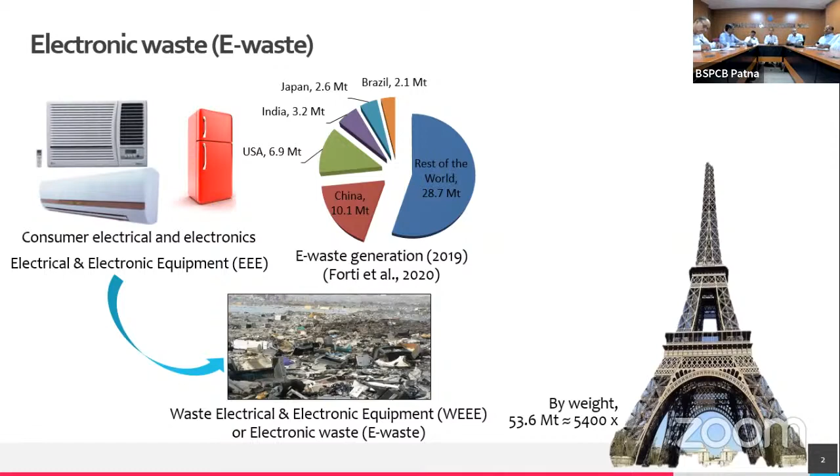If you look at the typical obsolescence stage of the various electrical and electronic equipment, you can see the computer's average obsolescence stage is 3 to 5 years. The laptop, and the consumer electricals and electronics mentioned, each refrigerator or washing machine, are 9 to 10. These are typical obsolescence stages. Because of this obsolescence stage, we need to think about this; we will discuss it at the end.

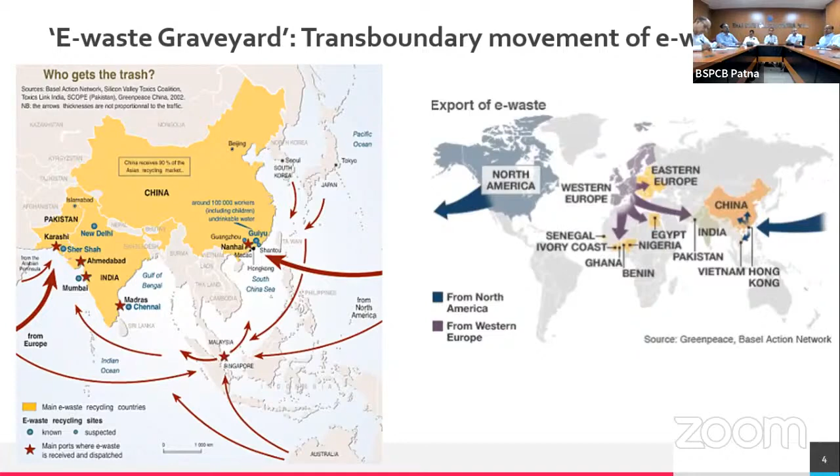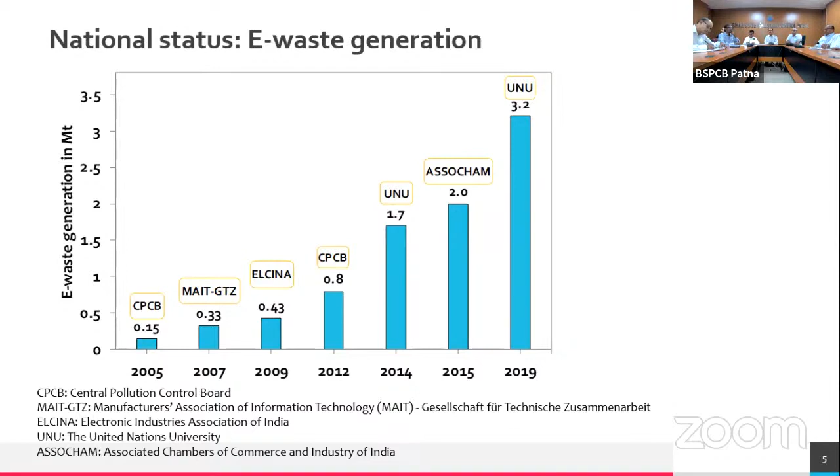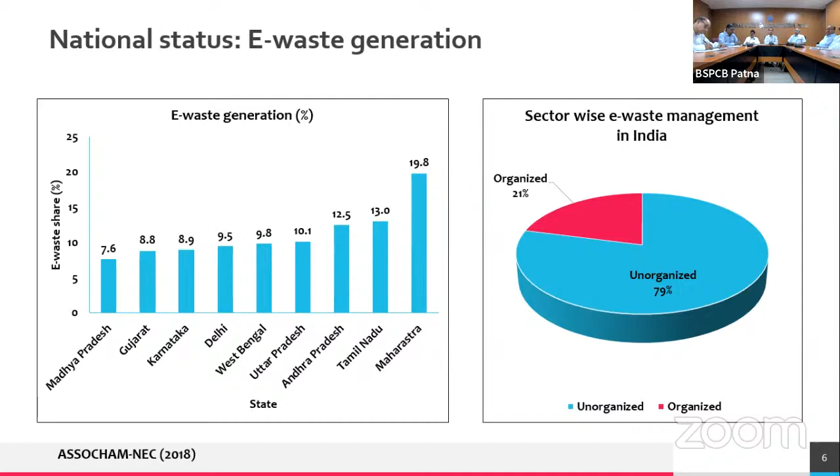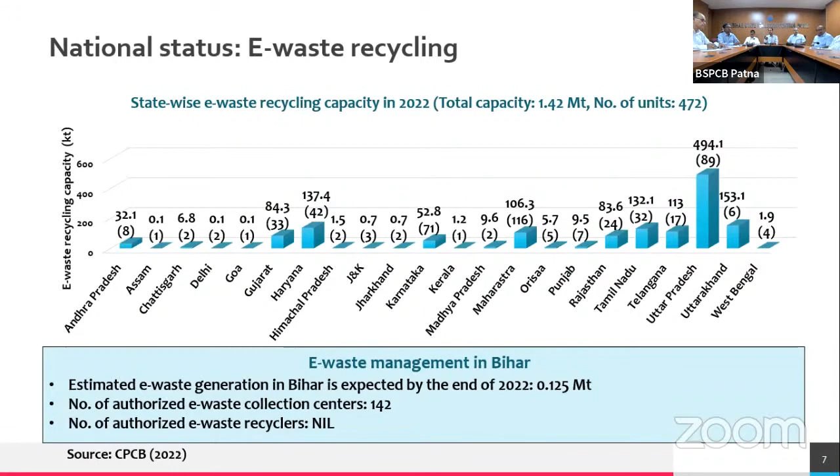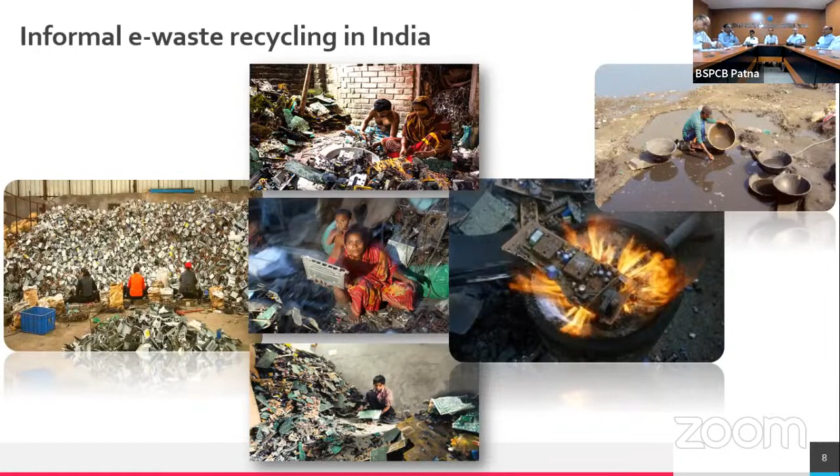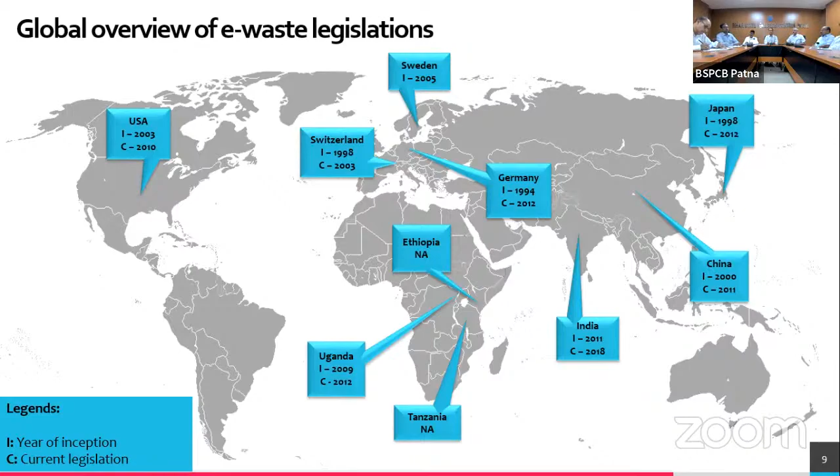Let's talk about e-waste regulation. First I will talk about the global view. All over the world, e-waste regulation started way back in 1990: Switzerland, Japan, the US. In India, we have started focusing on this area and developing a system. The e-waste rules of 2016 replaced the earlier ones, and were amended in 2018. Right now it's known as e-waste management rules. I will mention the salient features and not go into the next part, already dealing with.

And this is the extended producer responsibility plan, with a 10% collection of e-waste in the year for each producer, 10% up to 70% per producer. So a target approach we can implement. Also, we now have e-retailers as producers.

So if you look at the chain, what you have is essentially the producers. Producers have the dealer or the retailer. Some e-retailers are also producers. Let me clarify that e-retailers are those which exist including on the internet or the telecom network through which they sell electrical and electronic equipment. These e-retailers are very common nowadays, like Flipkart, Amazon, or eBay, and they are now considered producers.

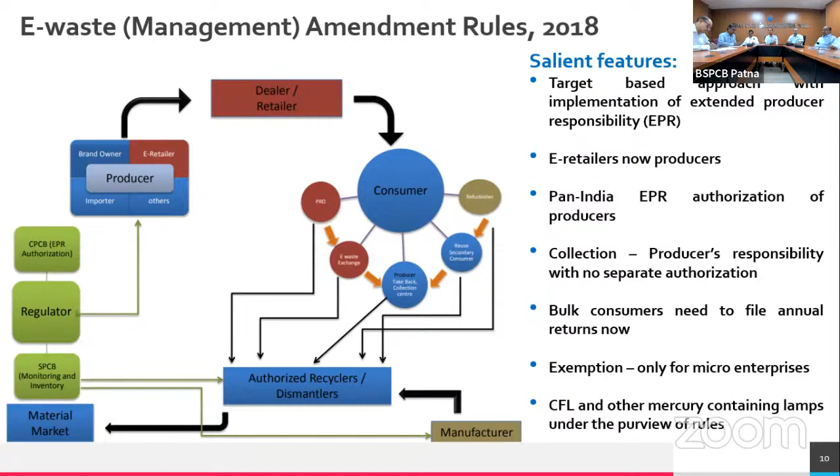So the stakeholders in this entire framework are the generators, which are the consumers and the bulk consumers. Then you have the e-waste handlers and processors, which include producers or producer responsibility organizations, PROs, through EPR, and producers also consist of dealers, retailers, and e-retailers. Recyclers and dismantlers also come under this e-waste handler and processor chain. Then you have the regulatory bodies: the Central Pollution Control Board, State Pollution Control Boards, or the pollution control committees in the union territories.

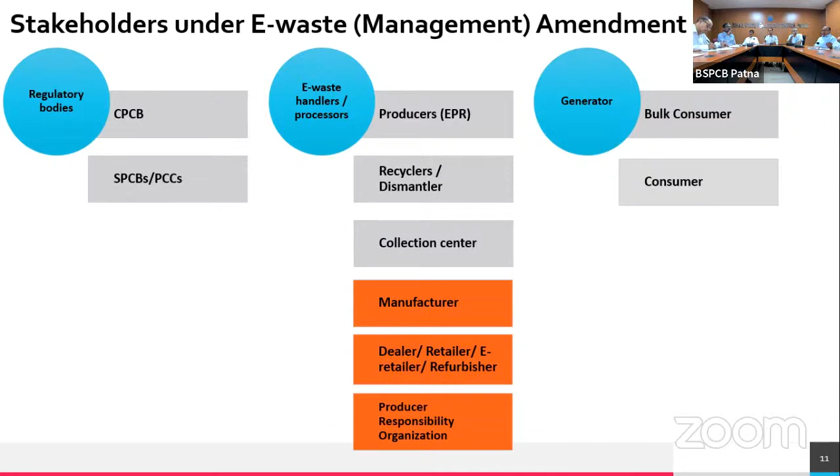Now let us introduce the circular economy, or CE, for e-waste as a tool. So far, what we are doing is taking a lot of natural resources, so that is the take. Then we are making the product, the electrical and electronic equipment, and then we are using it and disposing it. So what you have now is the take, make, use, and dispose model.

Now the circular economy is essentially a regenerative economic system, which is transitioning from this take, make, use, dispose model to a take, make, use, and regenerate resource model. Earlier, e-waste used to be thrown away or disposed of improperly or unscientifically, and thereby we have a lot of wastage of resources and wastage of economic value, and also environmental pollution.

So by transitioning from this take, make, use, dispose model to a take, make, use, regenerate resource model, we can have sustained economic growth, environmental protection, and it will also lead to a lot of job creation and societal well-being. And this is in line with the sustainable development goals which we need to fulfill by 2030.

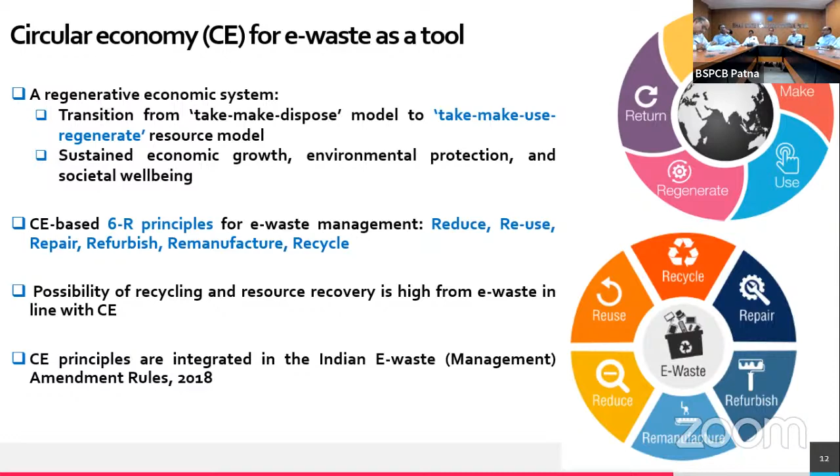Now let us look at e-waste composition. If you look at e-waste as an overall stream, we typically have around 37% glass and 30% plastic. The glass has a typical recycling route, as does the plastic, so we will not focus on glass and plastic in this talk. As the title says, we focus on the metallic part. When you talk about metals in e-waste, mostly you will have iron, copper, aluminum, zinc and lead.

These are the metals most prevalent in terms of weight percentage. Apart from that, most importantly, we have a lot of precious metals, like silver, gold, platinum, also present in substantial amounts. We also have a lot of rare earth elements, which are not typically the focus in the e-waste stream. These rare earth elements are pivotal for developing any new technology in the electrical and electronic equipment sector.

Now, a typical source of these rare earth elements is ores from mining. These mines are monopolistically controlled by a few countries, including China, and China has stopped exporting these rare earth elements. Another aspect is that their extraction from the ores is very cumbersome. So what is the way out for any other country? Because if you do not get rare earth elements, programs like Make in India will ultimately suffer.

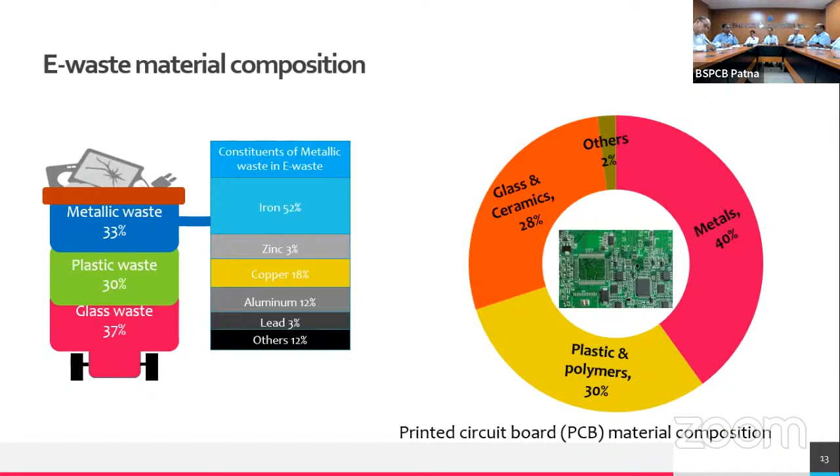So based on this, I can show you what you typically have. This is from our laboratory in IIT Patna, the pollution prevention and resource recovery laboratory. There you can see a typical end-of-life computer printed circuit board. On the printed circuit board you can see there are a lot of mounted components, apart from the base material or the platform.

In these mounted components, you can name any element and it is present, whether you look at capacitors, resistors, or the solders. Apart from these mounted components, in the base or the frame you have a lot of metals as well. People will understand why we are using, let us say, gold and silver here. Gold and silver are typically used as soldering material, apart from lead and tin.

Also, we need to provide some kind of thin film over this. The thin film is essentially of gold and silver, so that you can protect all these embedded metals from the corrosive environment. Otherwise, these electrical signal pathways will get corroded over the years. So a thin film of gold and silver is provided. So this is one example.

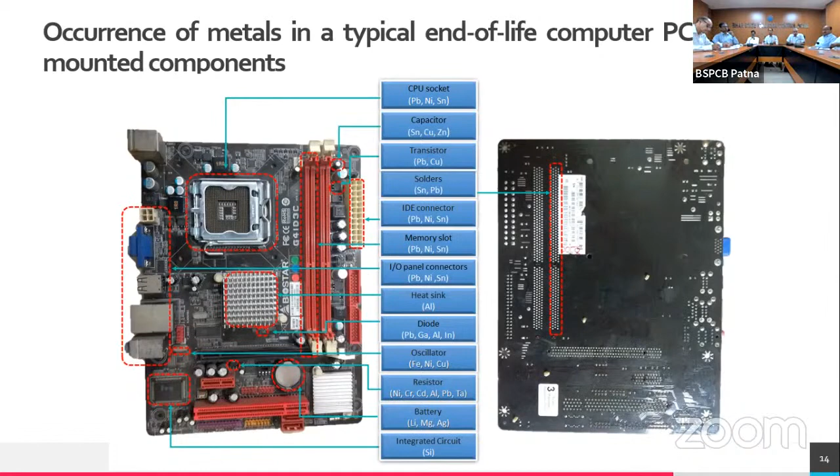Similarly, this is a typical printed circuit board of a smartphone. As you can see, in the mounted components, you name any mounted component, a lot of metals are present, including precious metals and rare earth metals.

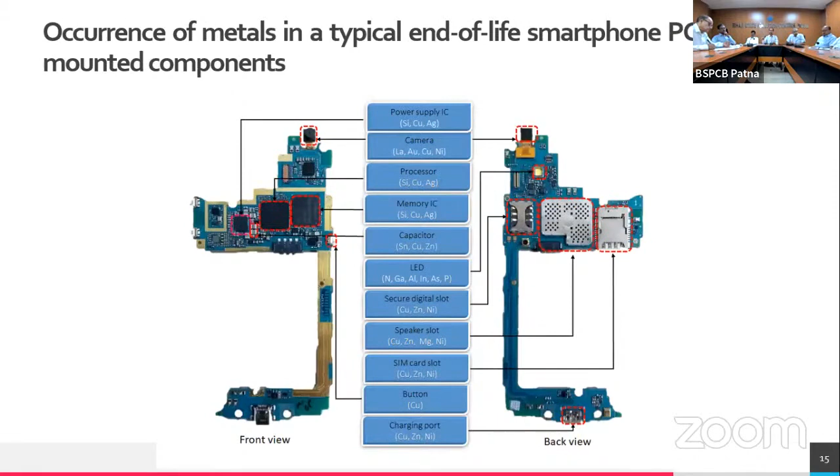Similarly, this slide is not working.

Yeah. So similarly, this is a typical printed circuit board of a cathode ray tube. Earlier, we used to have bigger tubes, so this is a cathode ray tube television, I'm not talking about smart TVs. This is the typical CRT TV printed circuit board, and this is a bigger one. Here also you can see a lot of mounted components apart from the platform or base. So everywhere, whether in the mounted components or the base, metals are present.

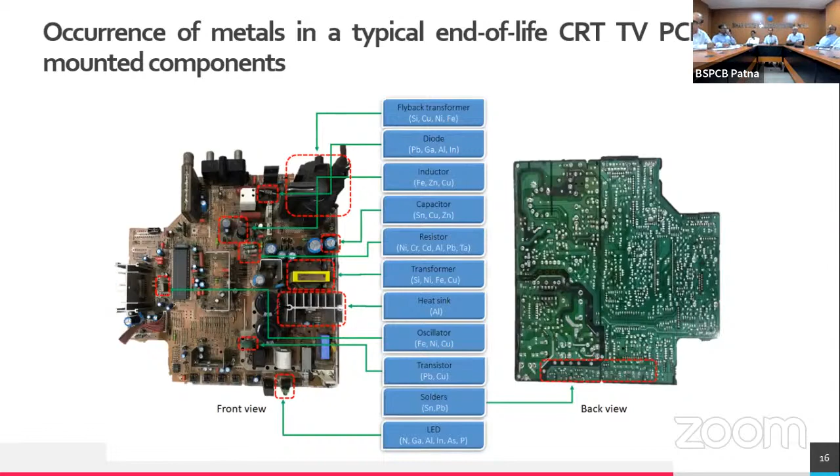So our job is to extract these metals from this complex platform so that we can reuse them again in manufacturing electrical and electronic equipment, so that the circular economy approach can be integrated. Now, since we are talking about recycling techniques, particularly focusing on printed circuit boards, the metal extraction or metallurgical techniques are essentially three.

Then the second technique is known as hydrometallurgy, also known as the chemical leaching technique. Printed circuit boards are subjected to chemical treatment. What kind of chemicals do you use? Typically, strong acids or strong alkali. What are the strong acids? Any kind of mineral acid, such as sulfuric acid, hydrochloric acid, or nitric acid.

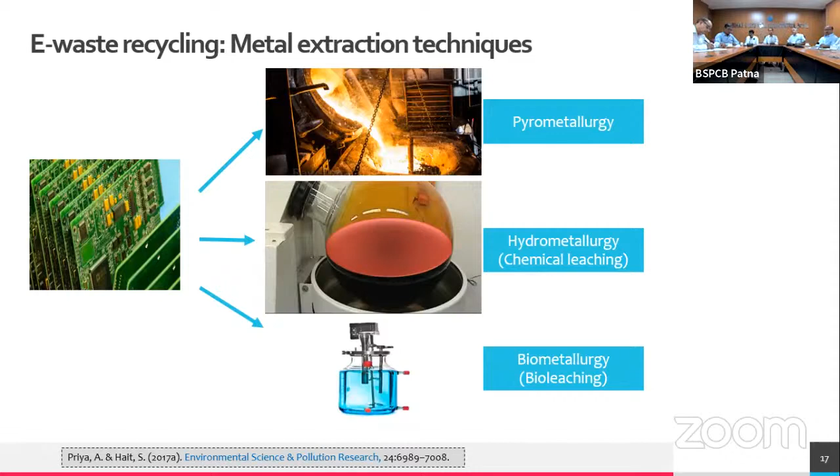So this process, biometallurgy or bioleaching, is eco-friendly and efficient. It does not create any kind of secondary pollution, but it is essentially a slow process, since we are employing microorganisms.

Okay. So if you look at the advantages and disadvantages I have mentioned here, from the environmental impacts point of view, the red one signifies extensive, the blue one is fair, and the yellow one is low. If you look at pyrometallurgy, the hazardous gaseous emissions will be very high, because you are burning the plastic, since the PCB matrix is essentially plastic. Then hydrometallurgy will have a fair amount, and the least amount of gaseous generation you will get in biometallurgy.

With respect to wastewater generation, you can see extensive wastewater is generated in hydrometallurgy, which could be corrosive or hazardous in nature. The least amount is in pyrometallurgy, and some amount can also be generated in biometallurgy. But biometallurgy techniques are essentially biodegradable.

Fine. So based on this, you will have compatibility with the environment. Here, high compatibility with respect to biometallurgy, followed by hydrometallurgy, and then pyrometallurgy. The least compatible with respect to the environmental component is pyrometallurgy.

Similarly, how much investment is required? The investment required will be very high in pyrometallurgy, followed by hydrometallurgy, and least in biometallurgy. Similarly, we provided energy consumption. Since we need to burn the waste, we will have a high energy requirement in pyrometallurgy, followed by hydrometallurgy, and then biometallurgy.

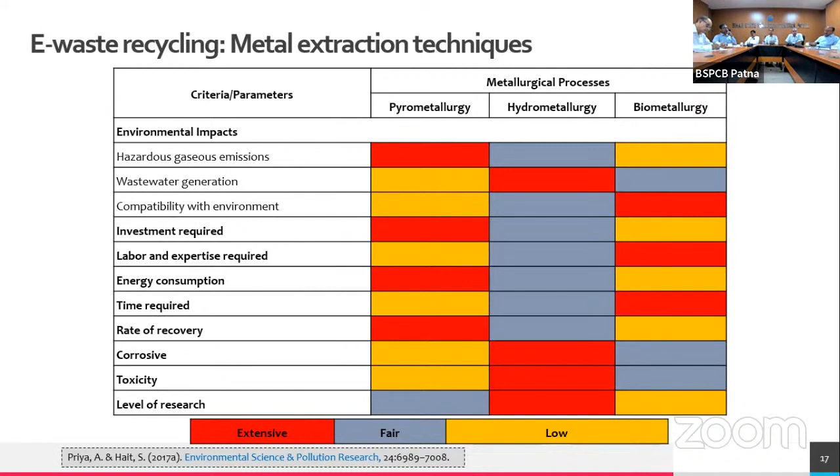Fine. So based on this, what was our motivation to work? If you look at the printed circuit board, with respect to its structure, its manufacturing process, and its composition, it can be of various types. Now, you have printed circuit boards from a lot of electrical and electronic equipment: some are IT and telecommunication equipment, some are consumer electrical and electronic equipment, some are large household equipment.

So our motivation was to see how the printed circuit boards we get from various electrical and electronic equipment differ in terms of composition. Because when you go for recycling or metal extraction of the printed circuit board, first we need to know how much valuable metals or other metals are present, and how printed circuit boards from different electrical and electronic products vary. So this was one motivation.

The second motivation was, let us say you do not dispose of or recycle this electrical and electronic equipment in an environmentally sound way, and you throw it into the open environment, with the solid waste stream, once it becomes obsolete. If it is exposed to the environment, sometimes it will come in contact with surface water, groundwater, or acid rain, and ultimately reach the surface water and the subsurface groundwater, and it will contaminate them.

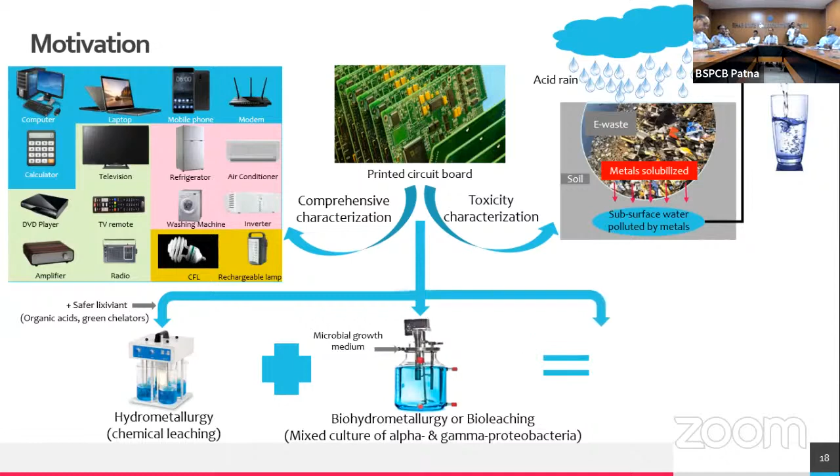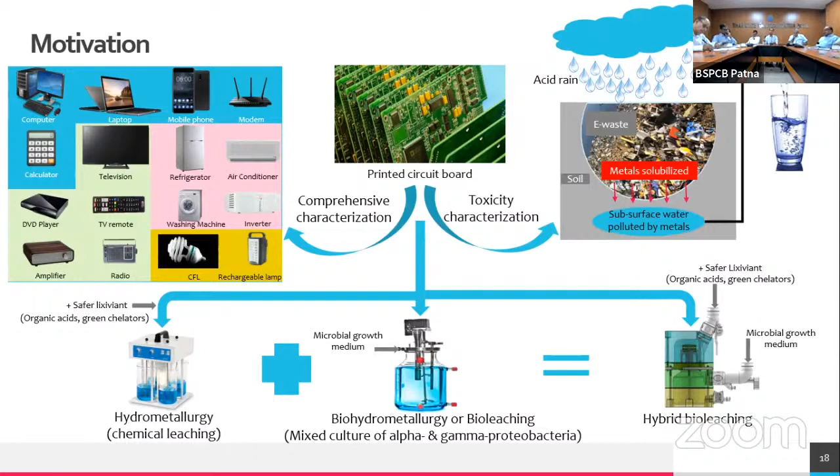And can we have some kind of technology development, which we call, let us say, hybrid technique or hybrid bioleaching technique. This is just one example that chemical leaching and bioleaching can be combined. And thereby process efficiency can be improved, as well as the time requirement can come down. So with all these modifications, let us first look at the characterization of printed circuit boards of various end-of-life electrical and electronic equipment before we go for their recycling effort.

So here you can see almost 16 electrical and electronic equipment covering IT and telecommunication equipment, consumer electrical and electronic equipment, and large household equipment. So from each of those equipment, we have collected printed circuit boards from 2 different brands, 3 each. So you have 16 electrical and electronic equipment, 2 brands, and 3 printed circuit boards from each brand.

And then we have characterized almost 33 elements: general elements, toxic elements, and precious metals like gold and silver. We have also characterized them in terms of rare earth elements. And we have also noted how, in a typical electrical and electronic equipment, the printed circuit boards vary in terms of their weightage. Methodology-wise, we pulverize or crush them, then acid digest them in the microwave digester, and then determine the metallic content in the ICP-MS.

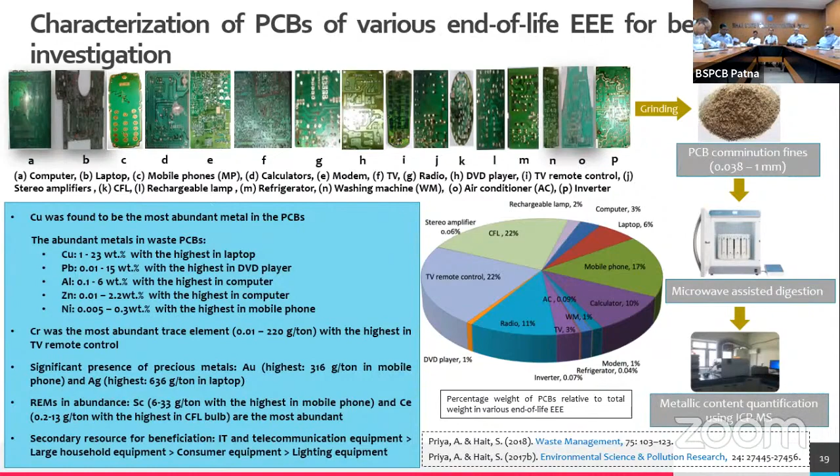Now, we wanted to also look at a particular product, let us say the mobile phone, and how its metal content has changed over the years. We have had basic phones in early 2000, and then subsequently, 2004 or 2005, we have smartphones. How has their metal content changed? And at the beginning of that period, a lot of international legislation also came, like the restriction of hazardous substances in electrical and electronic equipment, and the waste electrical and electronic equipment directive, essentially in the European Union.

So we wanted to look into whether, in a particular segment of electrical and electronic equipment, the manufacturers and producers have mostly focused on their market profitability, or on environmental well-being and environmental protection. That's why we have chosen the mobile phone as a product, and looked at how their material compositions in terms of metal have evolved over the years. So we have collected mobile phones from 2000 to 2016.

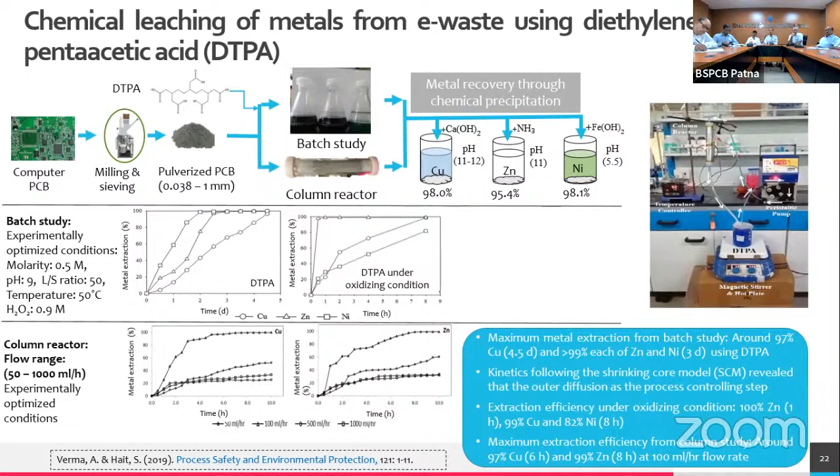So chemical leaching can also be utilized without creating secondary pollution, and it can contribute to the circular economy. The only thing is that we are not using mineral acid here. Only problem here is that it requires comparatively higher time. So there has to be some kind of trade-off between whether you want to harm the environment or you want to have a safer environment.

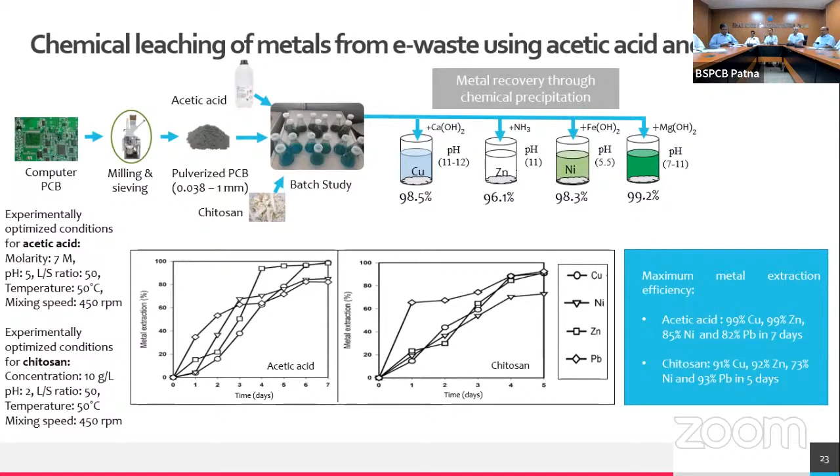Followed by this, what we have had is the biometallurgical technique or bioleaching technique. And there, as we have mentioned, mostly in the research they have essentially focused on individual species or a pure culture. So what we have done in our laboratory is we have taken computer printed circuit board, then we have provided pre-treatment. Then they are subjected to a mixed bacterial strain: one is Acidithiobacillus ferrooxidans and another is Acidiphilium. And they can complement each other. This kind of microorganism we have chosen.

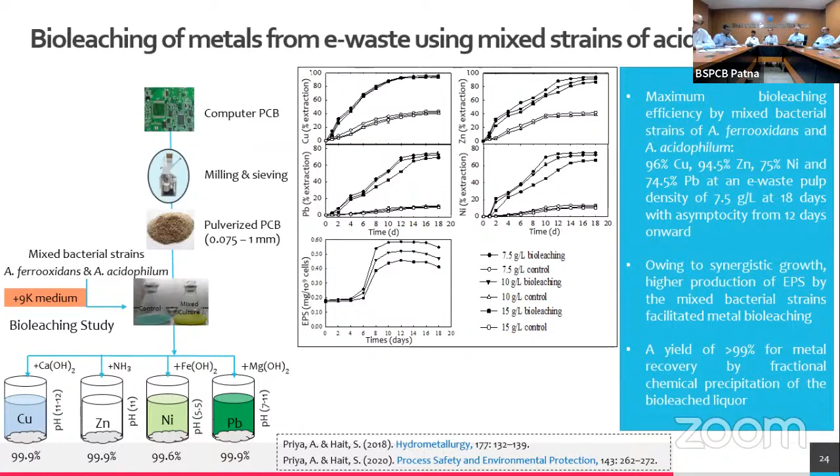So here also what we have seen is that whatever metals are extracted from this biometallurgical technique can be further recovered using chemical precipitation, and one can use solvent extraction or whatever other standardized techniques you have. And we can see the selective metal extraction efficiencies are also high in this case as well.

If you look at the mechanism, how this microorganism is acting on the solid particle or PCB particle, here we have ground them. In one mechanism, the bacteria, as part of their natural cycle, produce a lot of exopolymeric substances. Once they excrete these, using these exopolymeric substances they will bridge between the PCB particle and the bacterial cell. Now, as we mentioned, in the 9K media we provide some kind of iron salt, so you have plenty of iron. Now, what does the bacteria do?

One mechanism is what we call the direct mechanism. The bacteria attach to the PCB particle with exopolymeric substances, and then the bacteria also work on whatever ferrous iron you have in the media. So they are biologically oxidizing Fe2+ to Fe3+. Whatever metal you have in the PCB is in the ground state. Once you have this Fe3+, which is a strong oxidizing agent, it knocks the ground state metal to M2+, or let us say Mn+. So they are essentially bringing them into ionic state, and thereby they are available in the liquid medium. So this is what we call the direct mechanism.

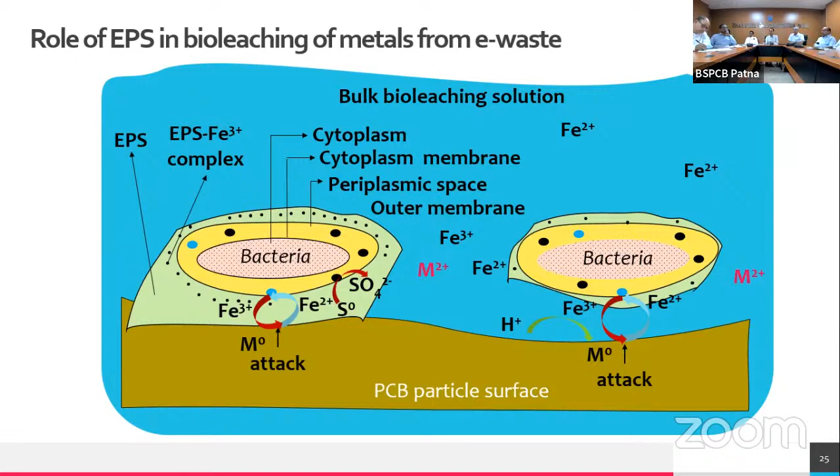Now what we have seen here in the biometallurgical technique is that even if you employ a mixed culture of bacteria, they are very efficient. But the time requirement is still, let us say, 12 days. Now we wanted to bring down this time requirement. As I mentioned, one motivation was to combine chemical leaching using safer materials with this biometallurgical technique. So what we have is a Jugaad method, something we use in day-to-day life.

Apart from the biometallurgy we have explained, what we have added is lemon juice. As you know, lemon juice contains a lot of citric acid, which is an organic acid. So pulverized printed circuit board, this mixed culture of bacteria, along with lemon juice, which contains citric acid. Thereby you have two actions: one is the biological action, another is the chemical action by the citric acid. That's why this is known as hybrid bioleaching. The chemical process can be anything. We have used citric acid, and I will also show that some kind of enzyme can also be used here.

Once we have this hybrid bioleaching, we can also recover the metals using chemical precipitation. You can see here the result using the hybrid bioleaching, bacteria as well as citric acid: around 98% of copper, 98% of zinc, 81% of lead, and 78% of nickel. But still, the time requirement is 12 days. So the efficiency has improved, but the time requirement still remains 12 days. So we wanted to further work on how this metal extraction time can be shortened.

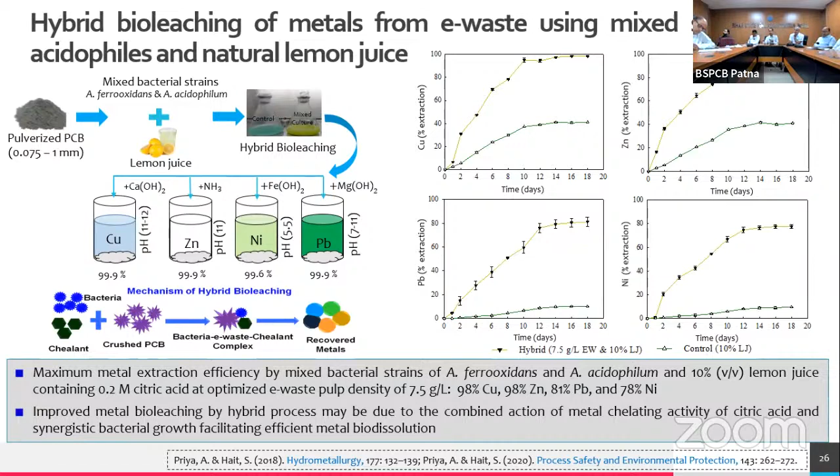Based on this, we have developed a two-step sequential hybrid bioleaching technique. Let me explain. Initially, in the single step, we used to add the printed circuit board ground particles, bacteria, and media together in the reactor. Then we got the metal extraction, followed by metal recovery by chemical precipitation. In the modification, you have the two-step sequential mode. Essentially you have Fe2+, which is present in the media. They are bacterially oxidized to Fe3+. And this Fe3+, as I explained, attacks the metal to convert it to M2+, and then again becomes Fe2+. This Fe2+ again takes part in the reaction. So a cycle goes on, and metal is continuously extracted from the printed circuit board.

So essentially, the ferric content is responsible for the metal extraction. So we first wanted to grow the bacteria in the 9K medium, so that whatever Fe2+ is in the media is fully converted to Fe3+. So when you add the printed circuit board, all the Fe2+ has already been converted to Fe3+, so that all the Fe3+ together can attack the metal present in the printed circuit board. This is what we mean by two-step, and during this process you can achieve maximum growth of bacteria, essentially the log phase, or maximum biological production of ferric iron.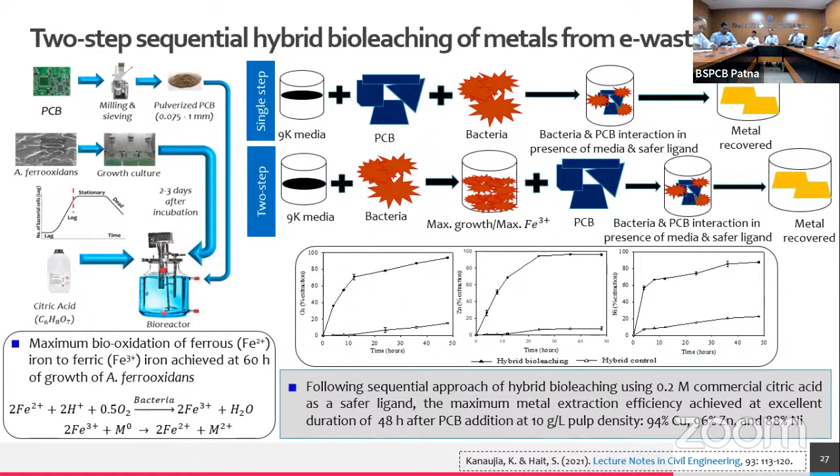Next, we wanted to have a similar hybrid technique. Typically, those are favorable in wastewater treatment. When you employ microorganisms, we need to maintain them properly. But can we think of using their product as a catalyst? Let us say you use glucose oxidase as an enzyme or biocatalyst. Glucose oxidase is typically used in the bio-Fenton process in wastewater treatment. We have applied the same process here in the e-waste management of printed circuit boards.

So glucose oxidase, pulverized PCB, and we have tried what is known as enzymatic bioleaching. For the first time, we have shown that the hydroxyl radicals generated during this process partially degrade the polymer matrix of the PCB particle where the metals are embedded. By partially dissolving that polymer matrix, it facilitates the dissolution of the embedded metals into the liquid medium. By doing this, we have got similar efficiency in a shorter period of time.

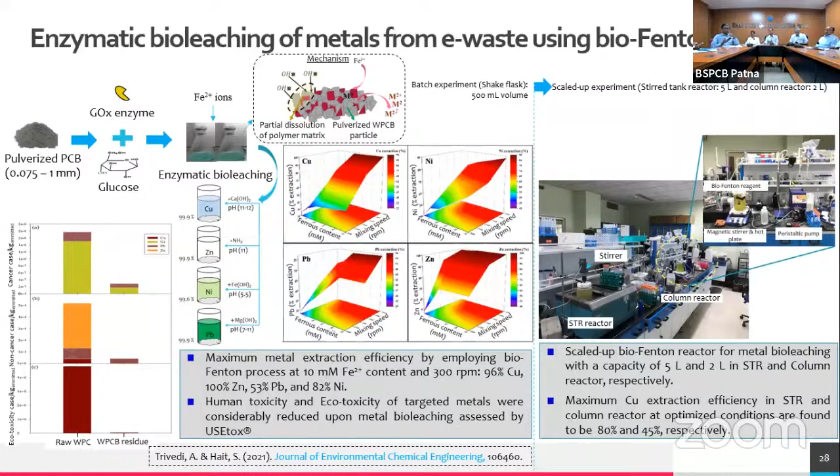So in a nutshell, all these techniques we have mentioned are mostly eco-friendly. In management or any organization, you will have a SWOT analysis: strengths, weaknesses, opportunities, and threats. The metallurgical techniques we have mentioned take an integrated and holistic approach without creating secondary pollution, so you can consider them eco-friendly. As far as possible, they have simple operations, high efficiency, and low energy requirement, unlike pyrometallurgy. So these are considered to be the strengths.

What are the weaknesses, and can we try further so that weakness can be converted to our strength? So with respect to weakness, let us say in the biological technique, we need to use commercial media or chemicals. Right? Can we think of some kind of waste material which can be co-treated with printed circuit board, and which can support the microorganism or provide the media? So we are also working in that direction, to have some kind of co-treatment of printed circuit board along with some other waste stream.

Also, what we have seen is that if you increase the waste quantity in the reactor, efficiency is coming down. So this is also a weakness. So we are also trying to look into this pulp density restriction, to alleviate it. And we are working further so that this weakness can be turned into strength.

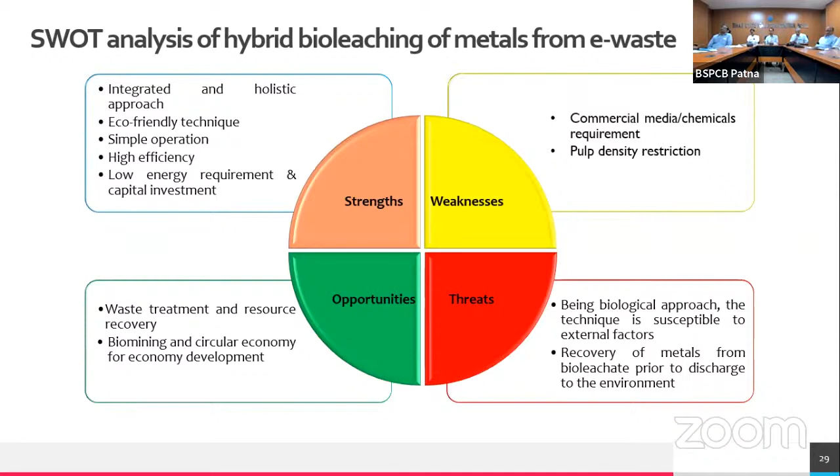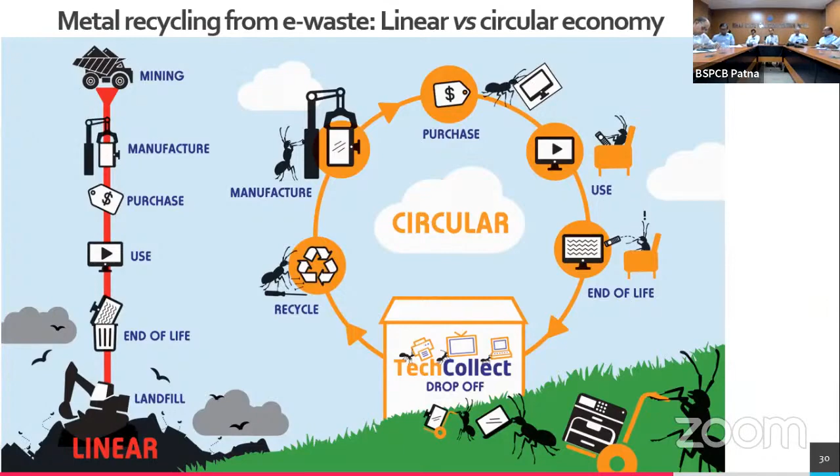So this is metal recycling from e-waste, linear versus circular economy. And that transition is very much needed in order to achieve the sustainable development goals by 2030, even in waste management. So I'll stop at this.